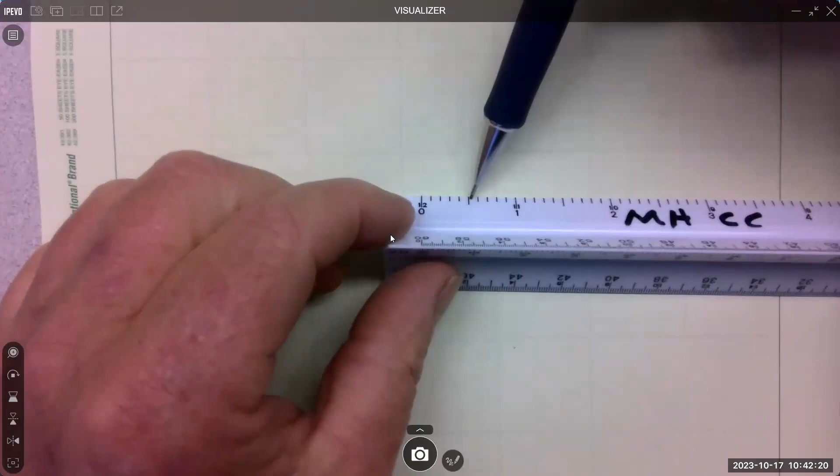So the engineering scale has a 10. For full scale, or 1-to-1 real size, there are 10 increments for every inch. So if you want to draw 1-to-1 with this scale, you're looking for the 10 scale, which means an inch is broken into 10 spaces, a 1/10. So this is 1/10, 2/10, 3/10, 4/10, 5/10. 5/10 is a 1/2 inch.

Now, going back and forth, if you're given information in fractions, like a 1/4 inch, you've got to use your calculator. If you don't know the decimal equivalent to a 1/4, take your calculator: 1 divided by 4, and that's 0.25. So where's 0.25? Here's 0.2, and there's 0.25, and that's about all you can do if you're manually trying to lay something out. What's nice is we can lay this on a drawing, or sometimes on an object, and actually do some measuring to get some idea.

Now let's figure out how the scales work. So what I'm going to do, and you can do this too if you want... focus. I'm going to draw a 4-inch line, 1-to-1.

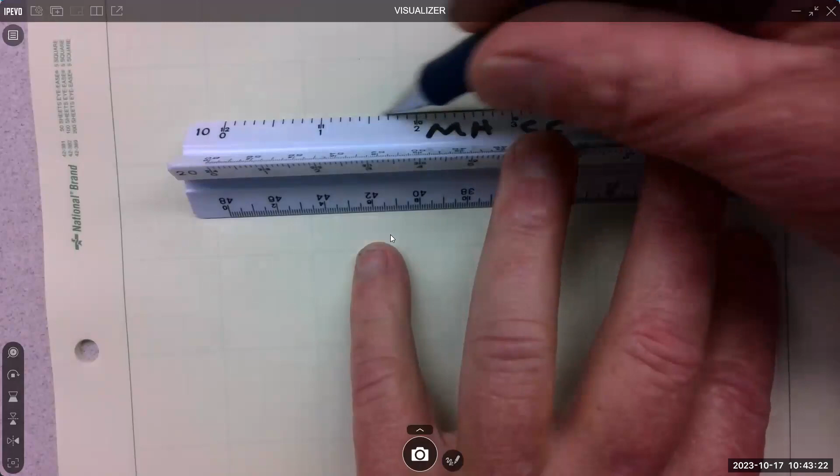Four-inch, and the scale is 1-to-1. That's how we write the scale typically. Sometimes you'll see it written out as 1-to-1, but it's not very common. Sometimes I have seen it written with a slash, which does not look good, it's not great. It does work, you could go 1-to-1 with the slash, but I wouldn't do it. This is probably the preferred way. And it's going to be in the title block, and that little box is going to say scale. So it's pretty straightforward.

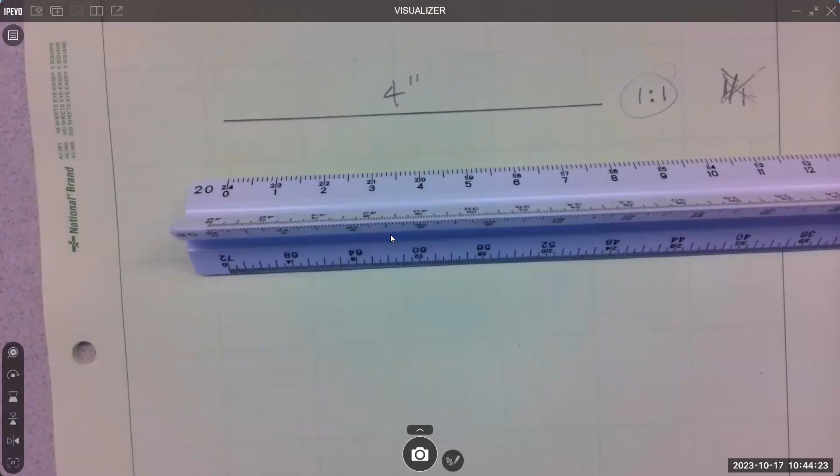All right, so then if I take the 20 scale, and this is how this scale works, you always use the real number. So if I want to draw a 4-inch line at 20 scale, which is a 1/2, that means there's 20 increments for every inch. That makes sense? 20 increments for every inch, and you can see they're getting pretty small already.

But if I'm going to draw the 20 scale and I want a 4-inch line, I literally just read the scale and go to the 4, and I'm reading that 4. This little 20 is just reminding me that I'm on the 20 scale.

And on the drawing, it would be labeled 4 inches, and this would be a 1 to 2 scale, half scale. It's half as big as the first line I drew. Make sense? What's nice about these is you don't have to do any math, you just read the scale directly and draw. That's what's nice about it.

If I wanted 10 inches at 20 scale, I go to the 20 scale, find the 10, and mark it. Boom. I just have to know what scale I'm working with and use that scale over and over. All right, it goes up to 30, so now I have to find the 30 scale, and I'm going to draw my 4-inch line.

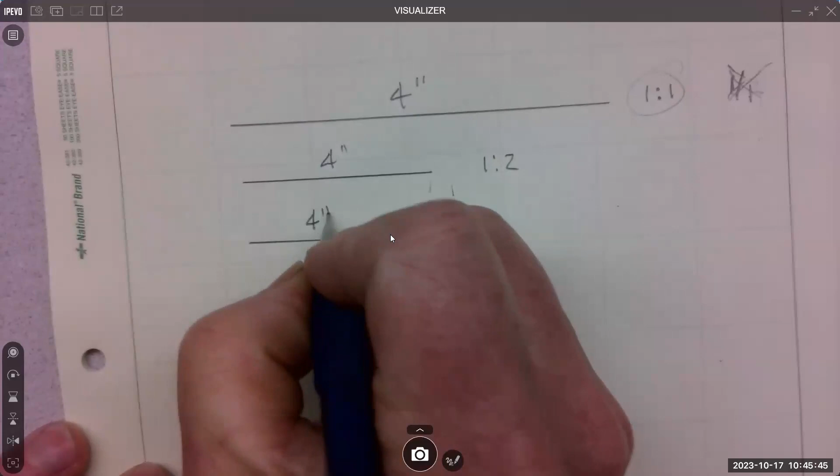On the drawing, it's always 4 inches. That's a 1 to 3 reduction. But if I was going to dimension it on the paper, it's 4 inches. We always put down what it really is.

That's how they work, and you get 6 of them. You get 6 times reduction with this tool. If it's beyond that, take this little tool and set it aside because it doesn't work for 1 to 10.

Yep, use that directly. Hey, I don't give you all the information up front. If I did that, we'd be done in a week and you'd be buried. We'd just dig you a pit and put you in it.

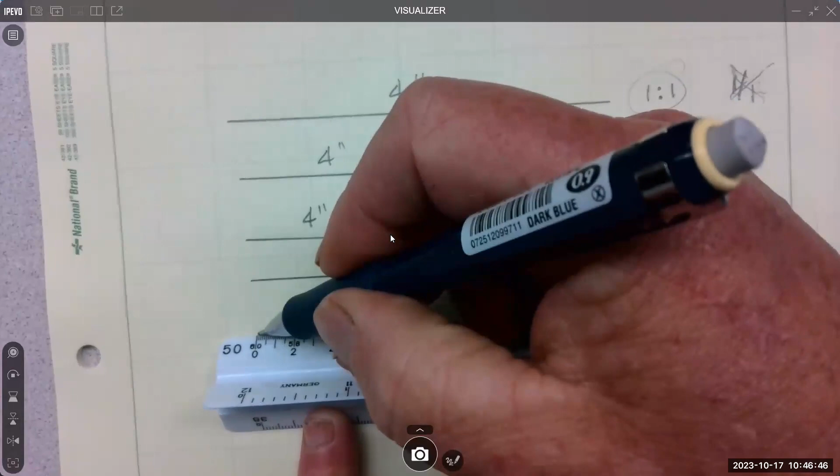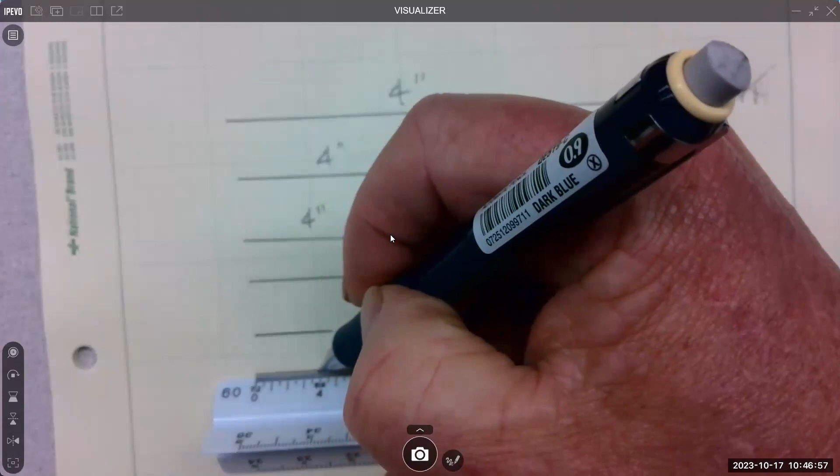All right, we're just gonna do them all, so you can just do them all. Here is 1 to 4, or 40 scale. Here is the 50 scale, which my eyes can just barely see the little ones. And then there's the 60 scale. I gotta find the 4, which is pretty easy to find. So I'm 1 to 3, 1 to 4, 1 to 5, and 1 to 6. And these are all 4 inches.

So 6 times reduction is pretty good. The tool does pretty well for that kind of thing. So once you figure out your reduction, you can use this, go for it. Just make sure you lay down the correct one. There's not a lot of difference between the 5 and the 6, so if you lay the wrong scale down and work for a few minutes, you just really muck things up. So, questions on the scale? It's handy, right?

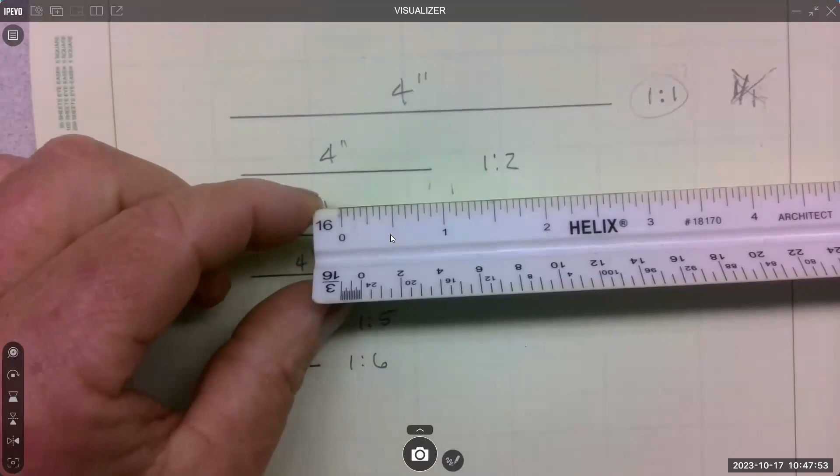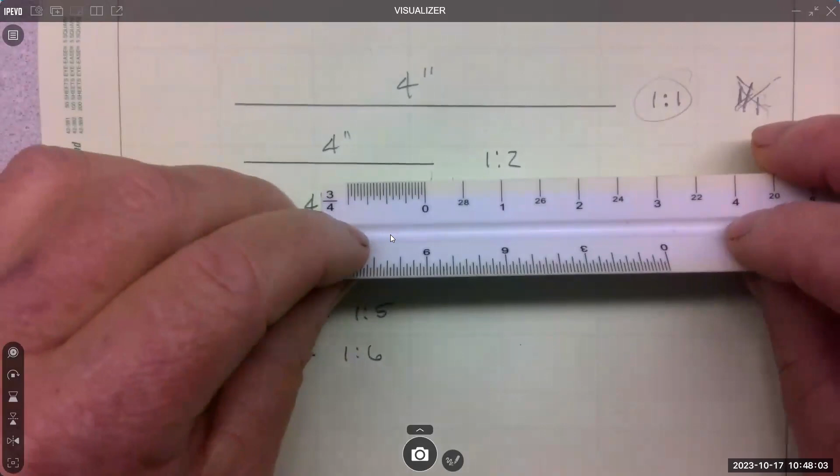The architect one is the same way. It's just a little more difficult to figure out, I think. So the 16 scale, that's a normal one, right? Then there's all these versions of it. Like here's a 3/4 scale, right? So there's 1 inch, there's 2 inches, there's 3 inches. If I want 3 point something, like 3 1/8, then I have to go this direction with it. 3 1/8, 3 1/2. So it's a little different to figure out, right? Architects are a little different.

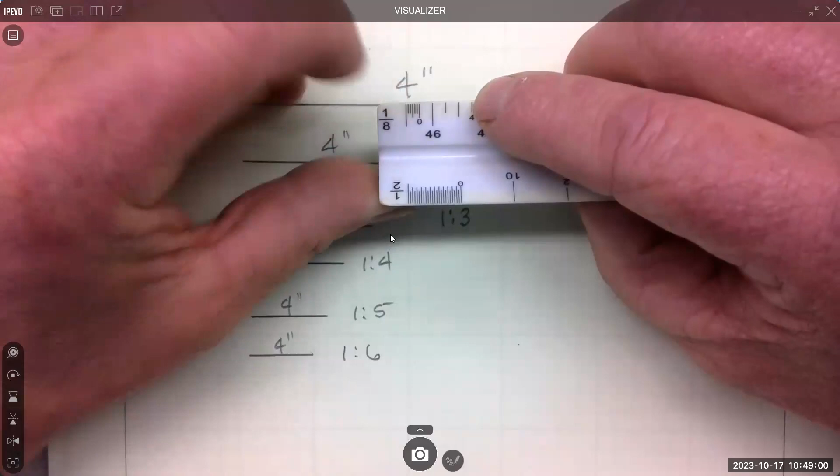It's 3/4 reduction, so that's 3/4 of an inch equals 1 foot. That's the reduction, right? And there's other reductions. There's 3/32, that's a really small one. And then there's an 1/8 scale. So if I wanted to draw a 4-inch line at an 1/8 scale, it's right there, from there to there. If I wanted to draw 4 1/2, I got to move this way and pick up that little half to right there. So it's weird. Anything over an inch, you got to look back at this part and come up with a little fractional piece. And that's just so they didn't have to put all those little lines on there. But once you get used to it, it's like, oh okay, I get it, right?

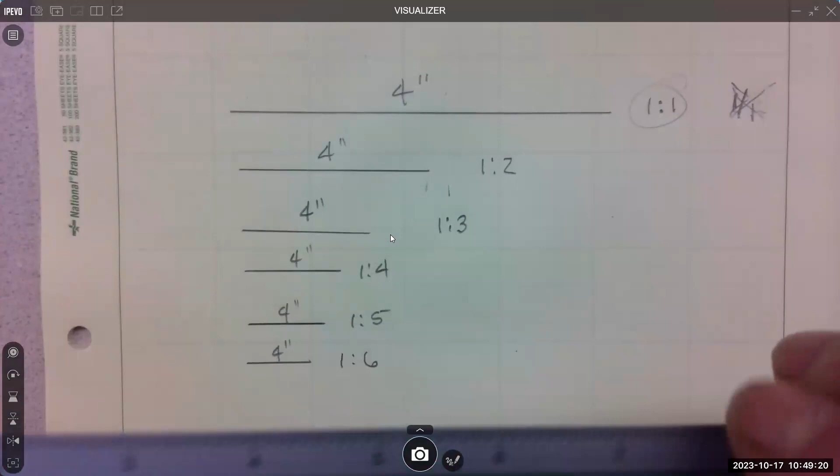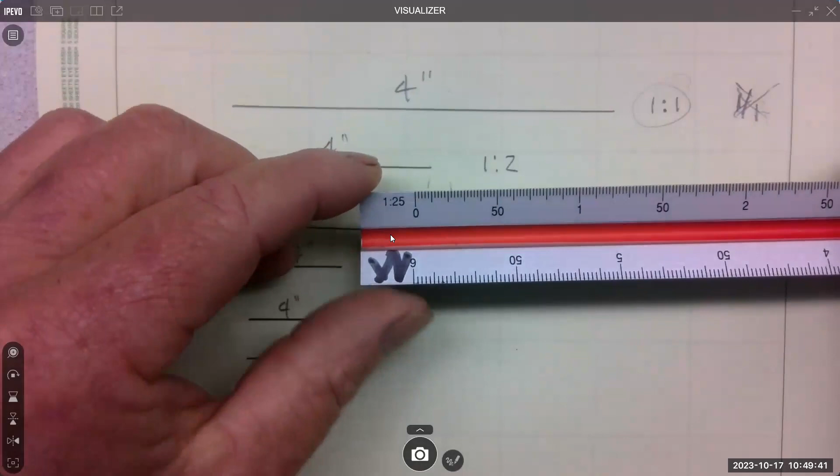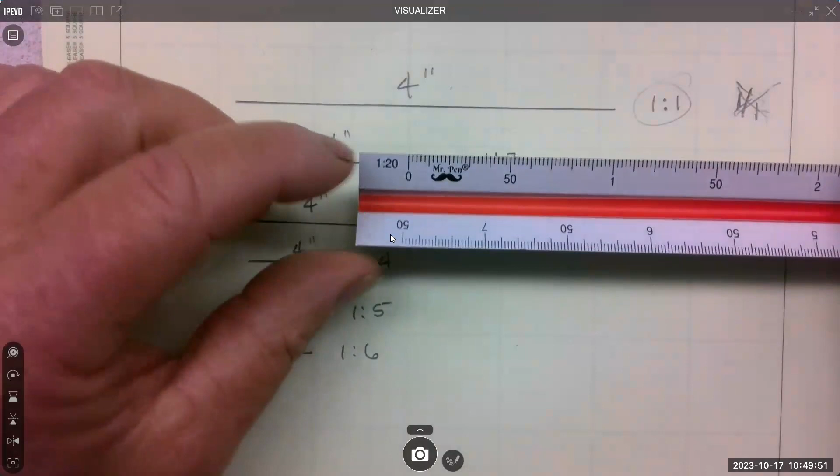So there's that. And then the metric one is similar to the engineering one, so you can figure it out pretty easy. Here is 1 to 100, 1 to 50, 1 to 20. So any of those scales you can get, and they actually show you the scale, right? 1 to 25. One to 20, and that's the reduction. So that's 50 millimeters. This whole thing's in millimeters.

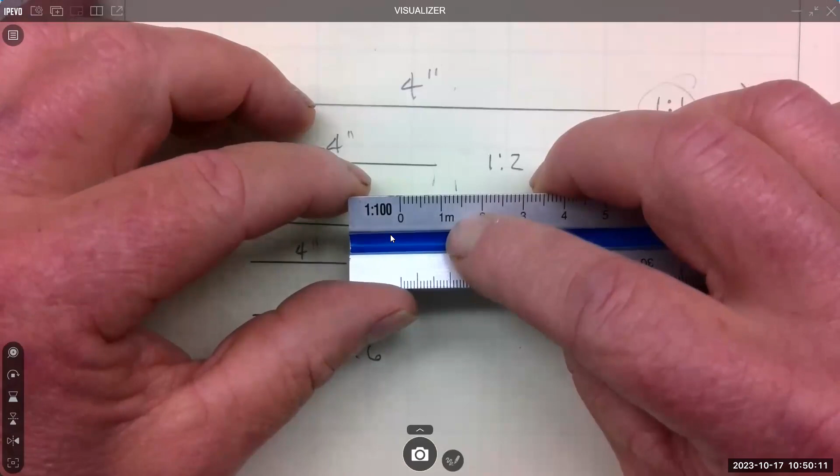Although I did see somewhere where they had it in meters. Oh yeah, right here, meters. So that's a 1 to 100 reduction. That's a lot, where 1 meter is right here, or 1,000 millimeters. It's like, whew, that is reducing. 1 meter is right there, right? 1 meter is 3 feet. That's big, so that's a serious reduction.

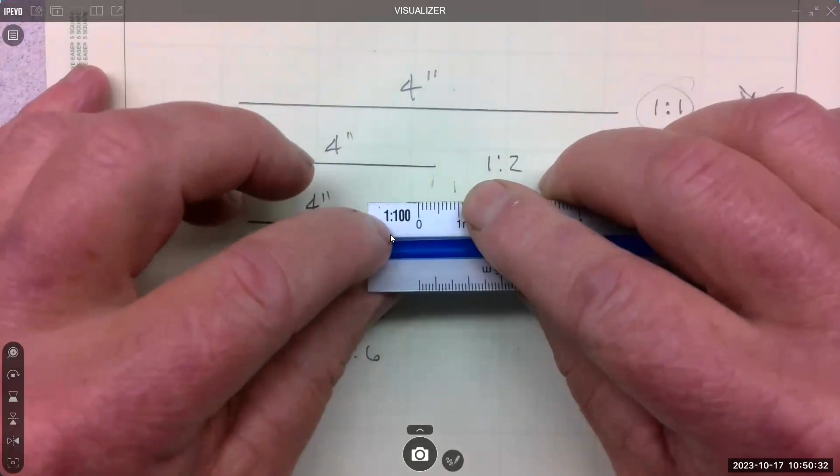So 1 to 100, that's 1,000 millimeters right there. So each one of these would be 100 millimeters, right? Because it would be 10 times 100 to get to 1,000. Yeah, I mean it takes your brain a second to figure this out, but not too bad.

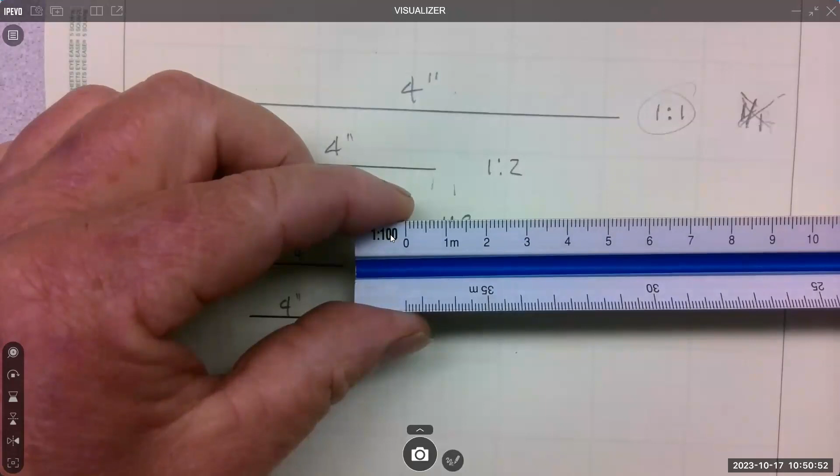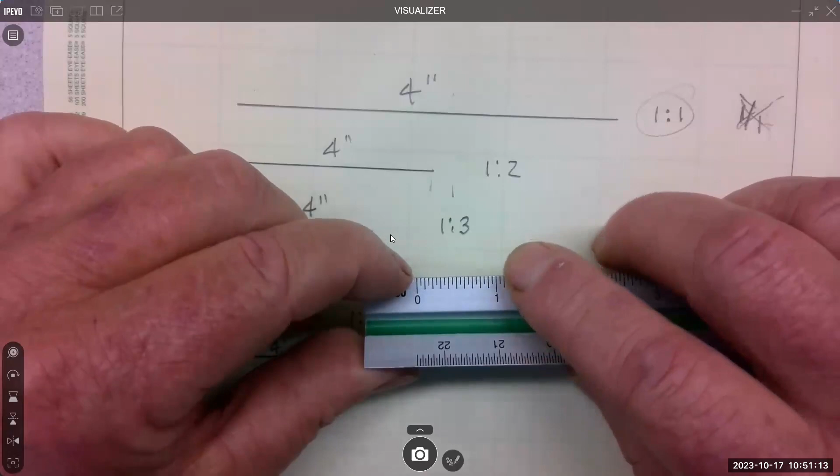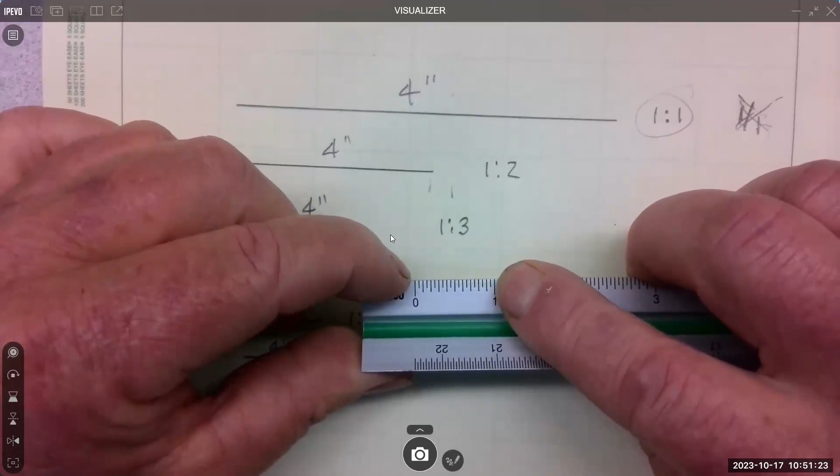So then you have the ability, especially with the metric system, since it's just factors of 10, to adjust that scale however you want, right? So if you said this was a millimeter, then that's some kind of increase, right? That's like 10 times, because I'm guessing that's a millimeter. So just change the scale in your head and now you're blowing something up instead of reducing it. That makes sense? This becomes 1 millimeter, then that's 2 millimeters. Well, that's 10 times bigger than what the object actually is. If you were drawing something really small, you need to make it bigger.

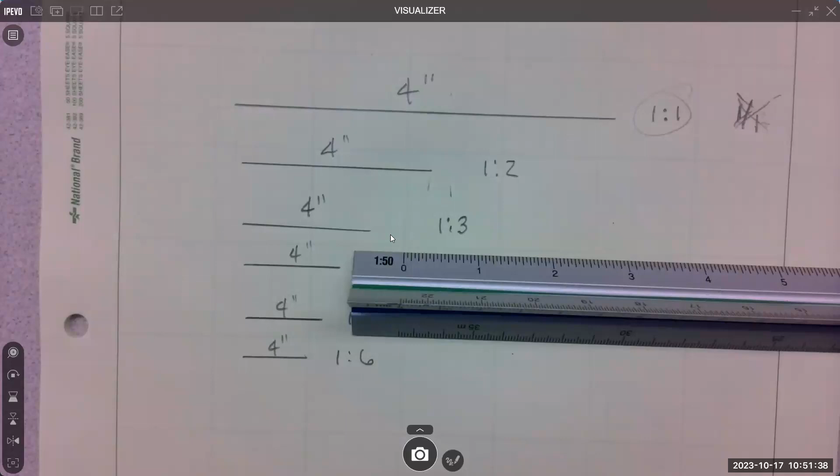These are not as good at that, although you can do the same thing. You can say, okay, I'm going to use this 10 scale, but that's going to be a foot. So that's a reduction, right? Or I could say, okay, that's going to be a foot.

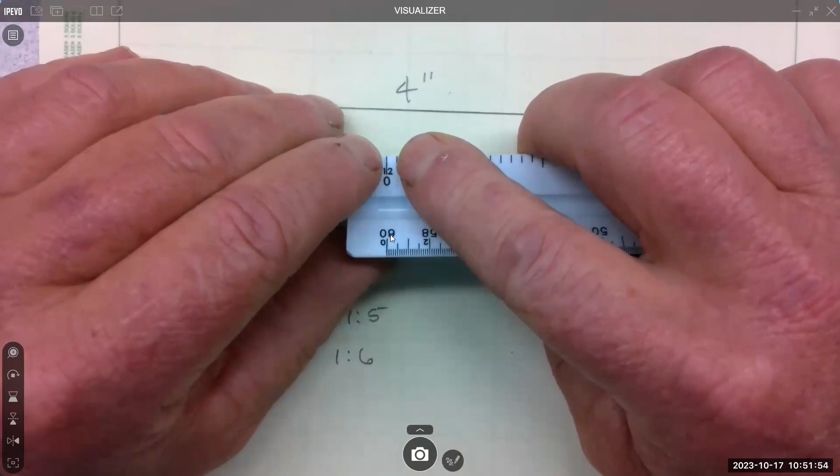So now I have a really big scale. You can create your own kind of scale with this whole factors of 10 thing, which is what this is. The architecture scale, you just can't do that stuff with it. It doesn't make too much sense.

All right, good on the scale. Hopefully you'll be able to use that on this last assignment. And you'll have other projects in this class. Like we do a project, and guess what, I make you do graphics on your project. So you'll be drawing more, using these skills through the term.

After this, we jump into Excel for a while and figure out how to make equations in Excel and make them work for us. Sometimes I make you make a drawing and then bring that into Excel. That's kind of an engineering package as far as how we'd use Excel. If you know Excel, big bonus, it'll probably go well. But if you've never done formulas before in Excel, that's a new challenge. And if you've never displayed formulas in Excel, that's the hard part—you can make formulas all you want and make them all work super cool.

But if you're going to share that document with other engineers, they're going to want to see the formula you're using. They don't want to have to go figure it out. Like, are you using the bending stress formula? Are you using the shear strain formula? Are you using Young's modulus? What are you using, right? You can't just have a bunch of numbers and say that's right. So we have to be able to show it. When we get into Excel, we do some pretty unique things.

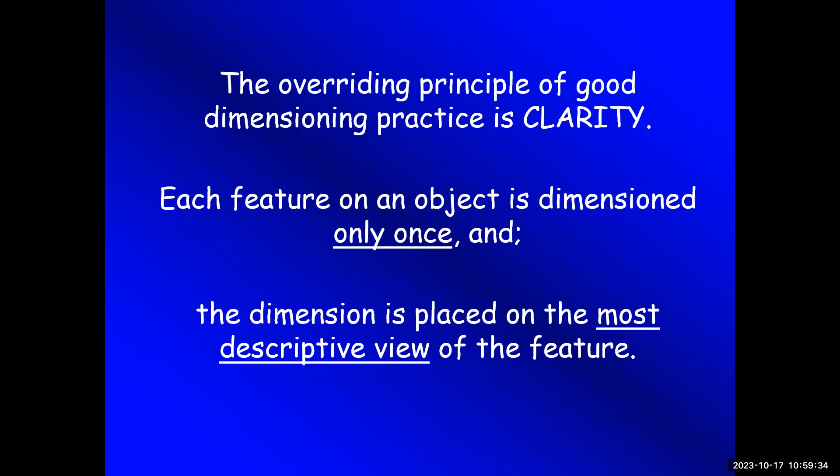But the last thing is we want that dimension, so like on this one - remember this one? We kind of did it as a practice thing. So the overall dimension, this profile is the most descriptive view, it should have the most dimensions on it. Because it's pretty clear that this dimension should be here and not over here in the right side view where it shows up as a hidden line. We cannot dimension to hidden lines, first of all, but you want it in the most descriptive view. So if the overall dimension is best here, this is where it should go.

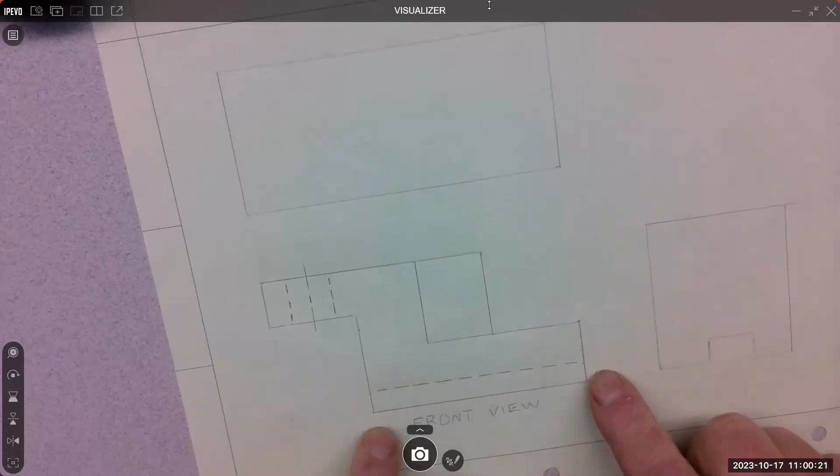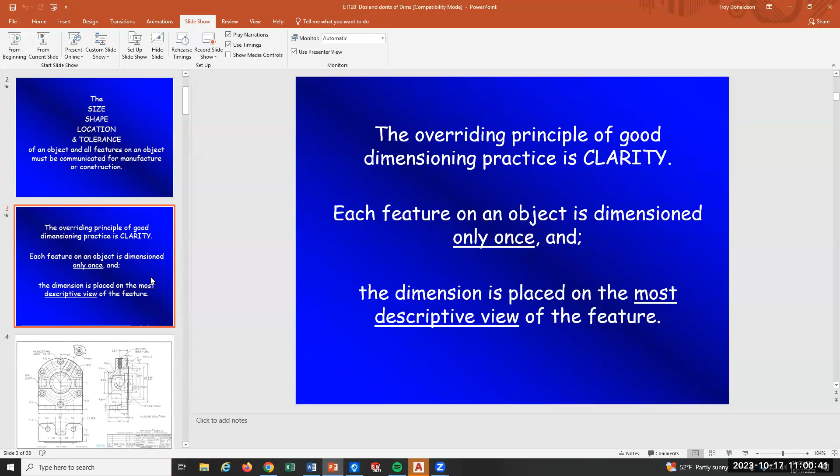If the location of this edge here is nicely viewed here, that's where it should go, not up here - like this, that may be a solid line up here, but this is a better spot for that dimension because it's more descriptive. So try to put them in the most descriptive area. I'm going to talk a lot about this, so if you want to take a note, you could. All right, clarity, we did that.

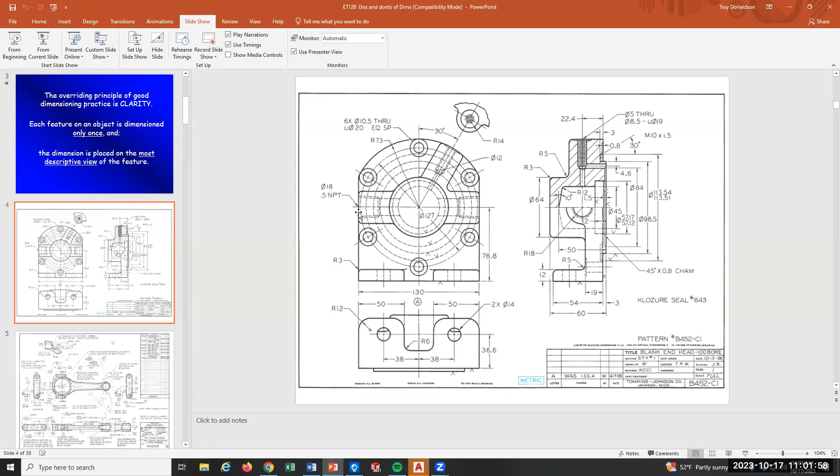One second more on leaders. The important thing on leaders is if they point to something - let me blow this up a little - if they point to something like this, that's perfectly legit. Notice it touches, the arrowhead touches it. That's important. We don't just point from a distance with a gap. And if the leader continued, it would go through the center.

Does that make sense? If this leader continued, it would go through the center mark. In other words, we don't come down and point to like an edge of a curve. We just go like where we would go directly to the center, but stop it at the object. And they can flip around, like they can be like this, that's perfectly legit. Or they can be like this.

I don't know about that. That's personal dimensioning preference. I'm not going to grade you on that. What I'd look for is that, hey, does that thing shoot through the center? Because that's what we want.

Frank, you had a question. Oh yes, Juan, you had a question. I answered it. Such a good lecture.

What's the 2 times mean? Means 2 locations, and it is very obvious at the 2 locations. That's the only time you can use it, is if it's so obvious, like in this view, there is only 2 holes. So that's perfect. I saw one up here that I thought was, oh, this is a different one.

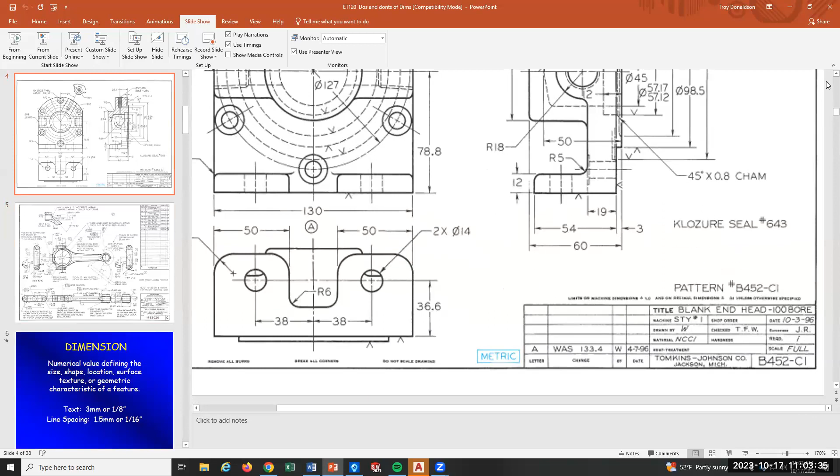Oh, that's pretty obvious, right? 5 locations for this thing. 1, 2, 3, 4, 5. Whoops. What? 6 locations. Okay, that's better. Don't get your locations wrong. So that's good. I mean, that saves you a lot of dimensioning, right?

So these fillets, they're all different, so they're all labeled and called out. A lot of times they're the same, so you can just call out R5, all fillets, right? So use that strategy and don't be afraid to use words to explain things. Like it's okay.

There's a lot going on here. We're not going to learn everything, but all these symbols, that's all part of dimensioning. In our book, you could look up all those things like this U thing. What's that mean? That's a bore. It's a boring process. There's I think some depth on here. I thought I saw an arrow and a depth.

Here's a chamfer. Right? So a chamfer is just not a rounded corner like this, but just a straight corner, like it just chopped off. A lot of times they're at 45 degrees.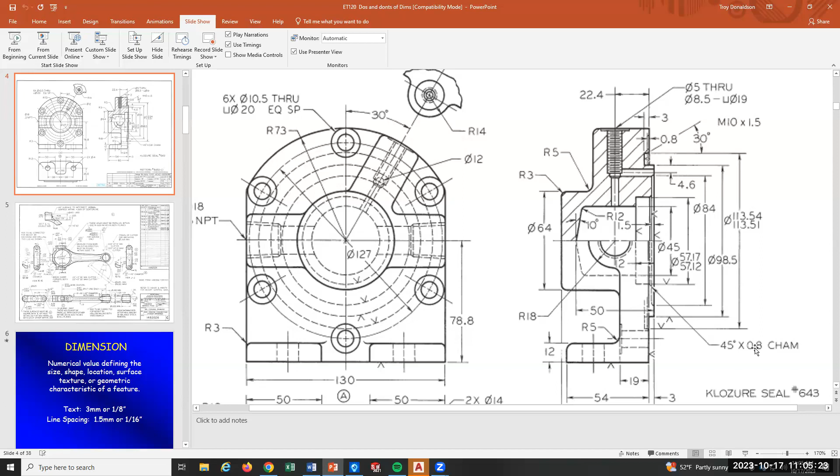This one's super hard to see because it's so small, a 0.8 chamfer. Sharp edges, really sharp corners, very high stress locations on parts that get loaded, and most parts get loaded, right? So we like to take those very sharp corners and just round them off with a radius or a chamfer. That'll drop the stress considerably. And when you take strength of materials, we talk about that a lot, and we do both those calculations, and you'll see it. So let's look at their dimensioning.

Looks pretty good, not much on here. I don't know why they put that on there. I would pull that off for sure, no reason for that to be in there. There's lots of space. So this is the same kind of thing. This dimensioning, I think it's actually an example, not a project a student would do. So some of it I don't quite get. Doesn't all follow the standard, but most of it's pretty good.

These are called dimension lines. I think I said this once before in this class. Why? Because it holds the dimension. And this is important because this is the lingo we'll talk about. I'll be like, your extension lines, they're terrible, or your dimension line is wrong, it can't do that, right? You got to know what I'm talking about, or what somebody else is talking about. So these are dimension lines.

What's that? It's a dimension, but it's also a tolerance. Yeah, so that means, hey, it can be 113.54 to 113.51, that's the target. It can be, that dimension can be anywhere in there. Right? And that's important for the person building it. Very important, so they know what they're going to aim for. So not sure what that is.

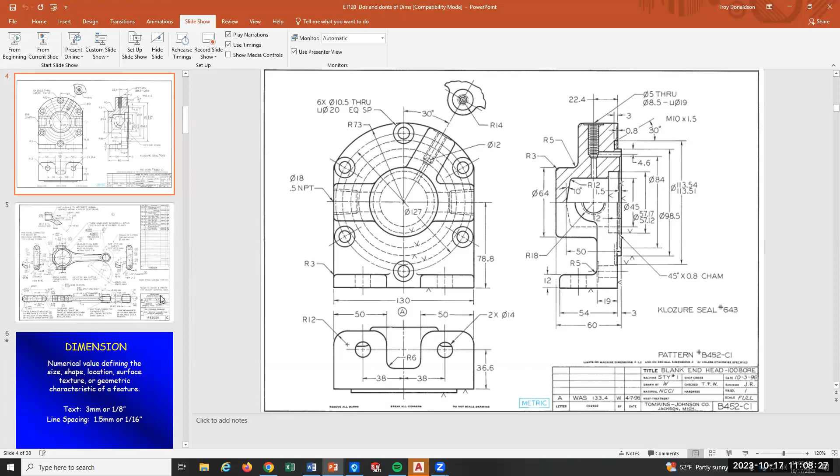I don't see a front view labeled here. Right here - nothing, didn't name the view at all. It's bad practice. Why not? You're labeling all these other views, why not label that? I'm sure an engineer would say it's obvious that this is the front and that this is what - the bottom? That's my assumption.

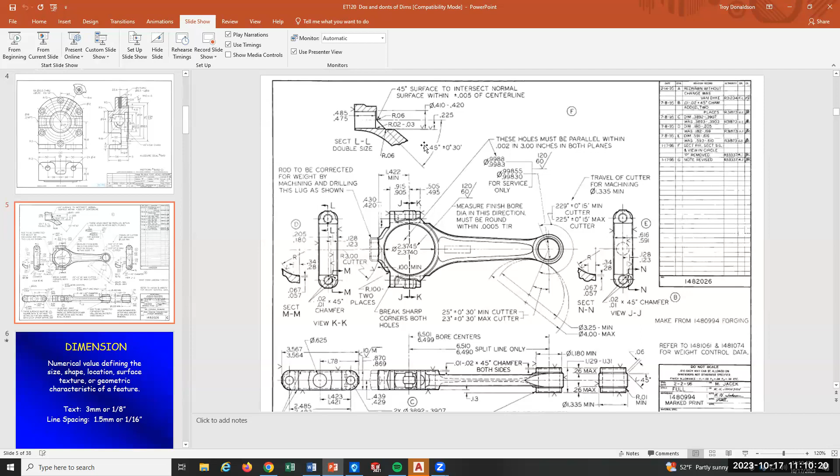Most prints nowadays are not labeled. Yeah, it's kind of a lost thing. But I don't like making the assumption, because everything's not in projection - like this is not in projection. Anyway, you can see we have a lot of different views. We're not even going to cover near all of the possible views you'll come across.

This is some kind of a blown up view - it's section LL, and it's double size. So I have to find section LL - here's one L and here's the other arrow, see that little arrow right there? It's just pulling out a very small piece right here and then putting it up there and blowing it up. So all strategies try to give a full shape description - that's our goal.

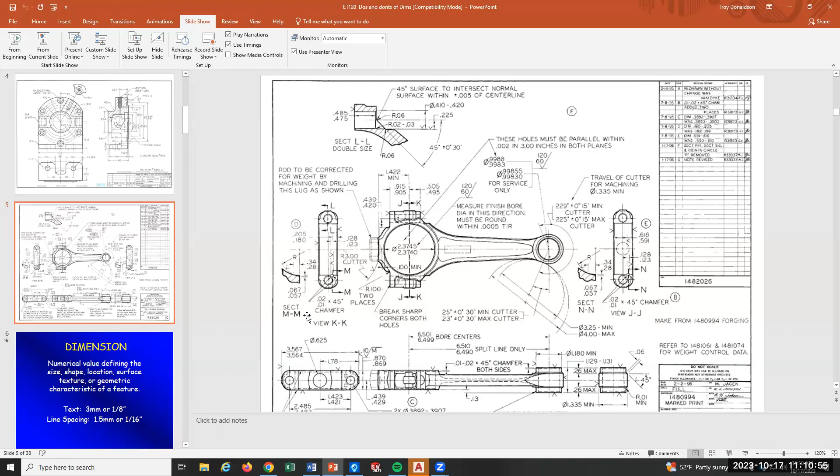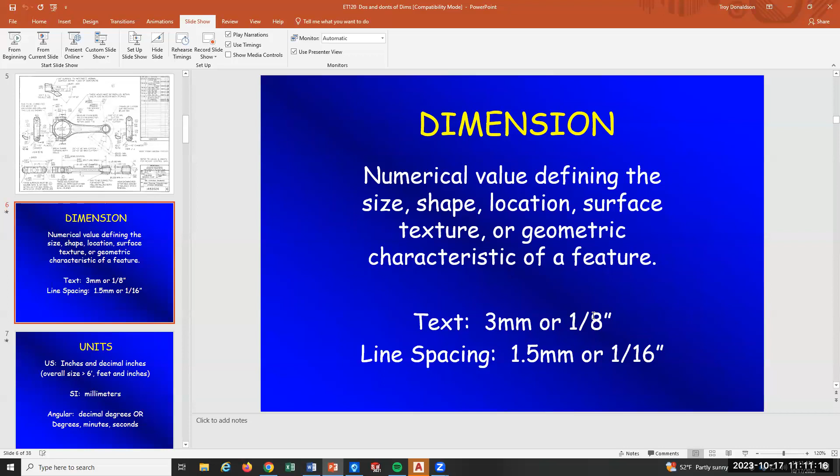A dimension has the numerical value defining the size, shape, location, surface texture, and so on. Typically, text is 1/8 of an inch in your dimension - that's what we want to put down. Line spacing refers to the spacing between the dimension line and the text - see that little gap? This is the dimension line, it comes, it stops, and we put our text inside the dimension line. It's about a 1/16 kind of gap - just make it close, but not too tight.

Notice how this one's offset - that's good strategy to get it out of the way of this extension line. This is actually a rule: extension lines are not supposed to go through dimension lines. That's a no-no, but they must have thought there was no other way to pull that thing through, so they just did it. We want to try to avoid extension lines or leaders blowing through dimension lines.

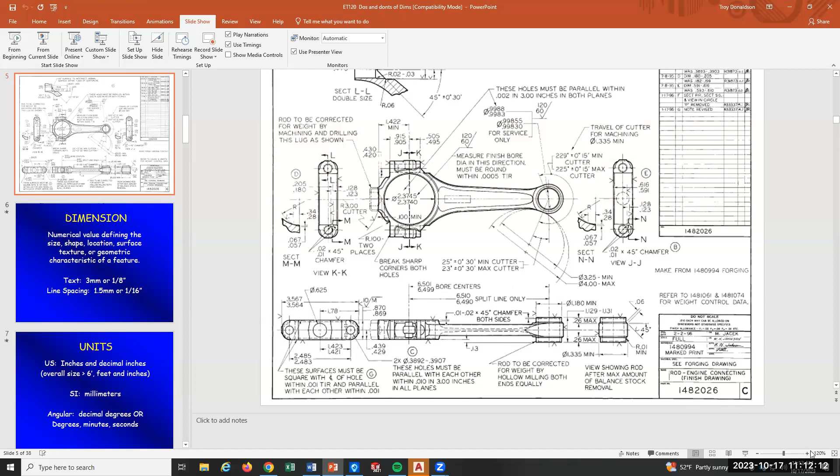Is there ever an instance where it's just too busy, so you do a second page for the next view? Yeah, definitely things like that happen. This is super busy, but it's really hard to put views together in your head when they're on separate pages - this is a lot easier, believe it or not. This could all just be on this page, and these projections off of it could be on a different page. Very possible - this is a super complicated thing to try and draw.

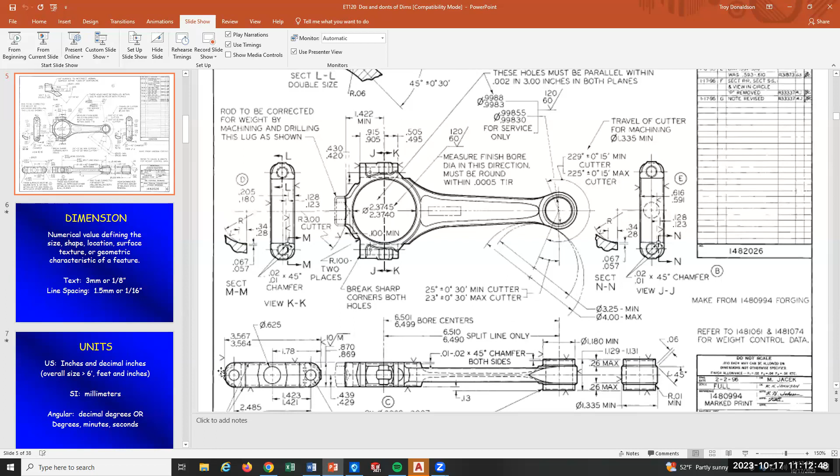We're going to use decimal inches when we put our numbers down. You don't have to put the little inch symbol if there's a note in the title block that says dimensions in inches. So that's what we want - put that in the title block, and then we don't have to use the little marks for inches. We're not going to use feet, the assumption is it's all inches, but it needs to be in the title block. If it's millimeters, that needs to be in the title block too.

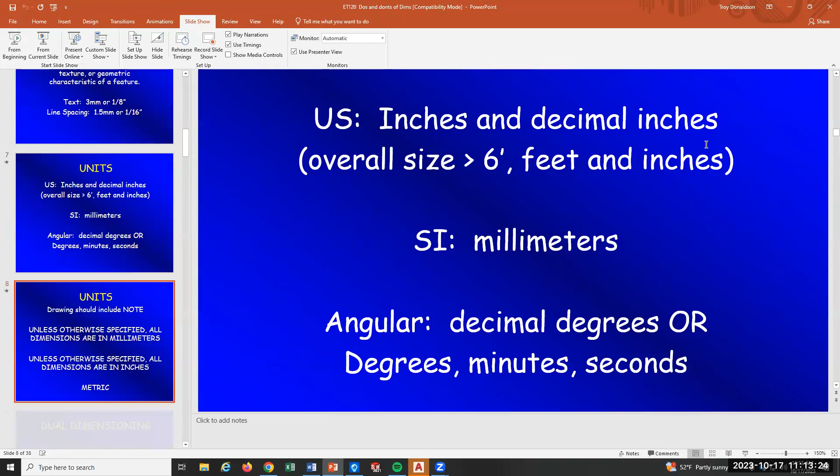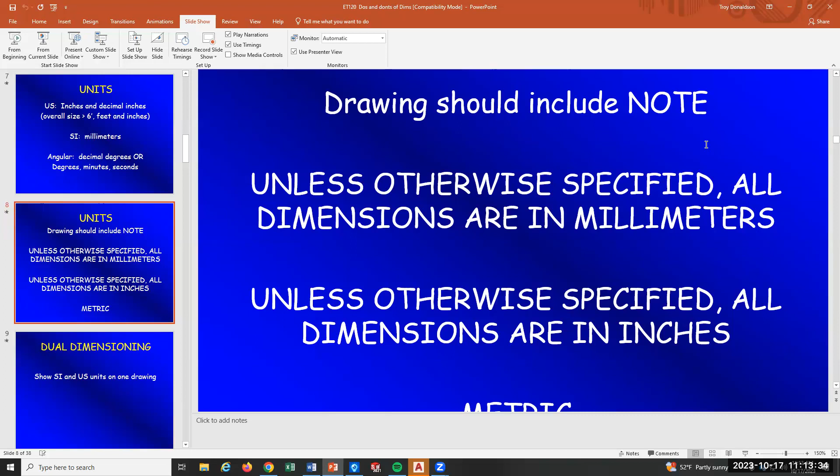That's the note, it's all good. Dual dimensions, we're not going to get involved in that.

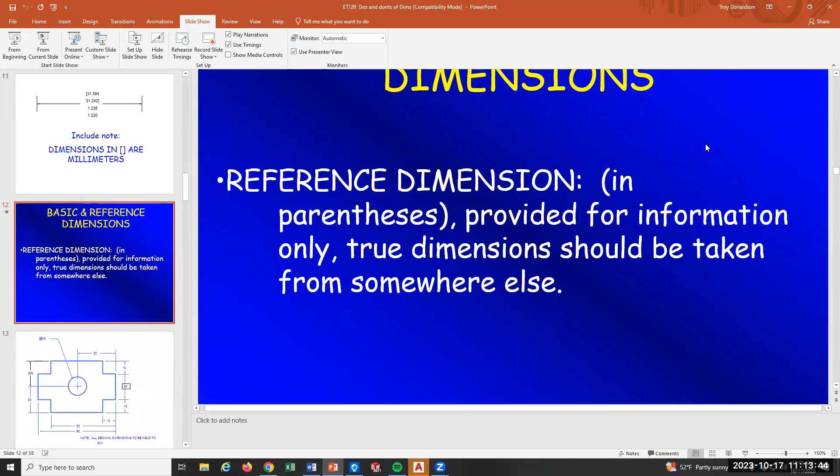Not doing it. All right, so let's talk about some basic dimensioning. Here's the note down here: all decimal dimensions should be held to a basic tolerance. That would usually be in the title block. If I don't give you a tolerance, don't worry about it. You don't have to put it in, because we're not really going to go there yet.

But if I look at the dimensioning here, just as an example, this is good, this is all good. This one you have to decide whether you need it in there or not. If it's symmetrical and you leave it off, people could wonder, what's that dimension? Should I assume it's symmetrical?

So this one is put in, just in brackets, so we can talk about it. If you note the object is symmetrical, then this center line really should go all the way through. That's a standard for symmetry. If a center line goes completely through the object, it's symmetrical. But you could also write on that center line 'symmetrical,' then the question's answered.

And in manufacturing, that note right there, the 1 thou note - you'd question the engineer: do you want 1 thou overall, or 1 thou per branch? Is it plus or minus? Is it just plus 1 thousandths, meaning it can just grow bigger than all these dimensions?

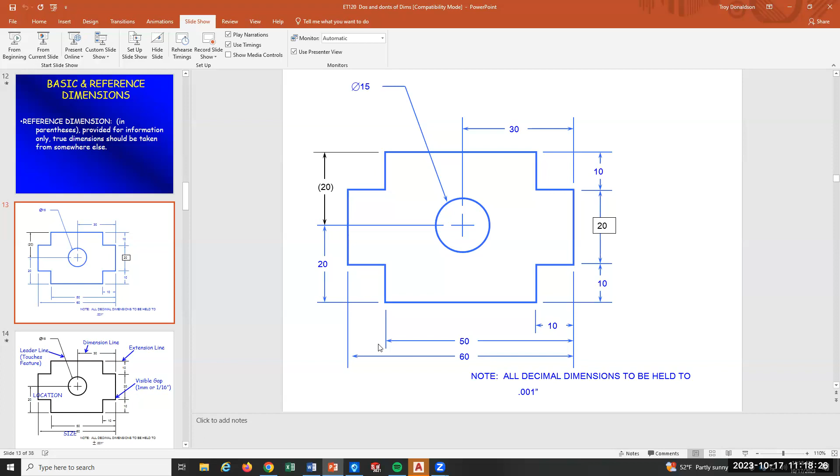No, but you want it to follow some kind of standard, so they look at it and go, oh yeah, I kind of get that. So here's everything called out. This is a location dimension. The 20 is locating the hole, and the 30 is locating the hole.

Where you pull it from is up to you, unless there's something called a baseline for the part. That's kind of next level dimensioning, but it's weird that you would pull from this side to get the 30 and from the bottom to get the 20. That's kind of odd. It depends on where the important features of the part are. But if you're just gonna do it, I would keep it together, like the 20 would be here, and this 30, I'd put it over here instead. So X and Y are relatively close to the location for this, just so they're kind of in the same proximity.

If we don't know a baseline and we don't care where we're pulling from, which is the way we're going to operate, then cluster the dimensions, get them close to each other, so the individual doesn't have to do higher level math to figure out exactly where this hole is. It looks like it's right in the middle. This is 60, that's 30, this is 20. I don't know if it's symmetrical, but I'm gonna assume it is.

So, visible gap, extension line, dimension line. These are the sizes of all things.

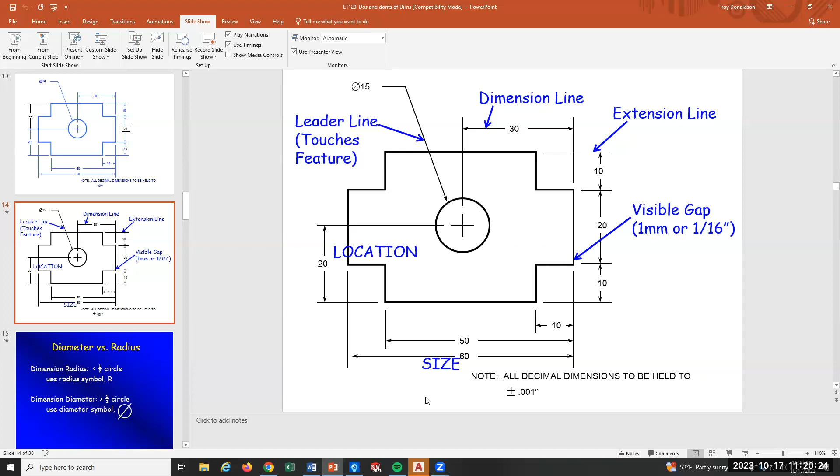That's enough, just use that practice to do this next exercise. The object is simple, which I expect everyone to get the front, top, side correct. Then you're going to spend your energy trying to figure out the best way to dimension it. We don't want to leave anything off. We want to know the size and shape of the entire object. I don't know what else is in here.

Those are different ways you can get a dimension in. Don't jam it. We want our dimensions to look like this, but if there's just not enough room, you are not allowed to make your text smaller, like a 16th. No, we need 1/8 inch text throughout the drawing. We can't make it smaller just to squeeze it in.

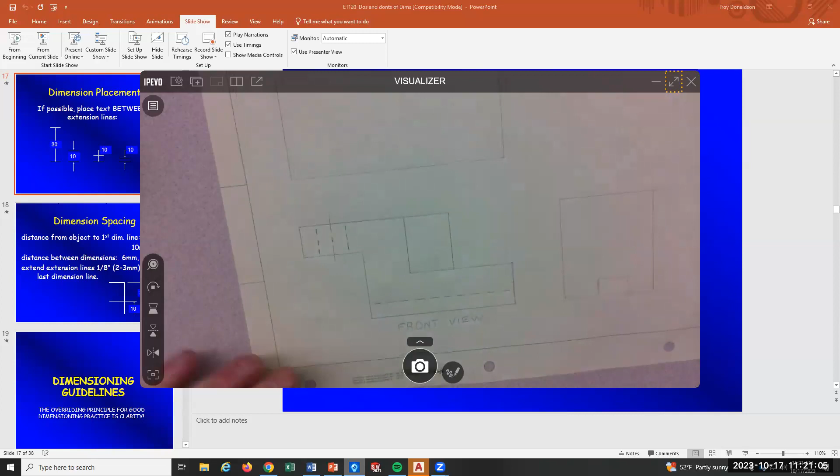Arrowheads, there's a standard for that, believe it or not. People, if you haven't done arrowheads, struggle with this. They're normally the text height in length, which is going to feel kind of big.

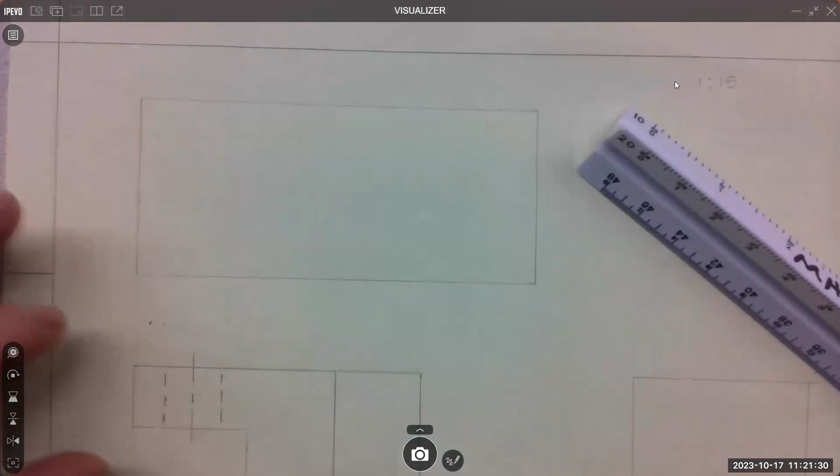If I'm 1/8 inch text, that's from here to here, so that means my arrowhead is the same length as the text. So that's about the right size. I don't know what I was marking there.

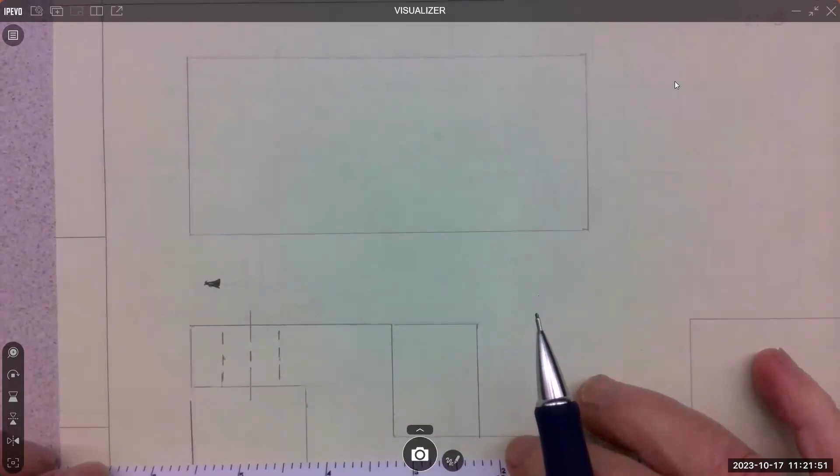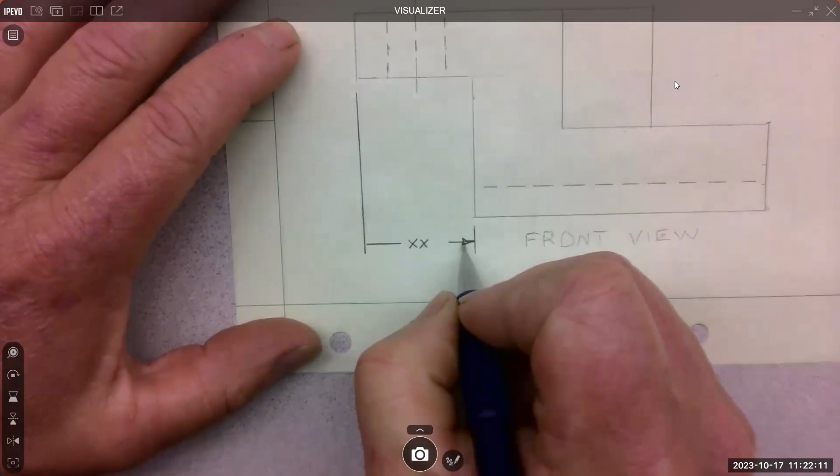I wasn't marking anything. So here, I'll put an extension line down here, pull this off, and then I'll put in a dimension of some kind. Leave some space. So there's my dimension that I'm pulling off. If I have 1/8 inch text, that's about that tall, then the arrowhead typically is that long. You just pull it out and make it super skinny, and it's super easy to fill in. That's about all you want for an arrowhead.

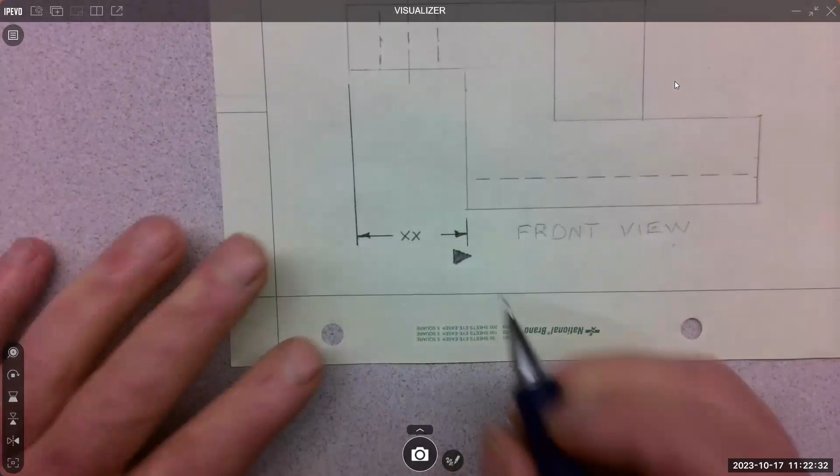Doing it manual, they don't need to be like that, and then you gotta spend an hour and get a bunch of graphite on your drawing and just make a mess. So not like that, just find your spot. I'll do another line, and just pull it out a little. They're super skinny and tiny, and they just kind of mark a spot and they touch.

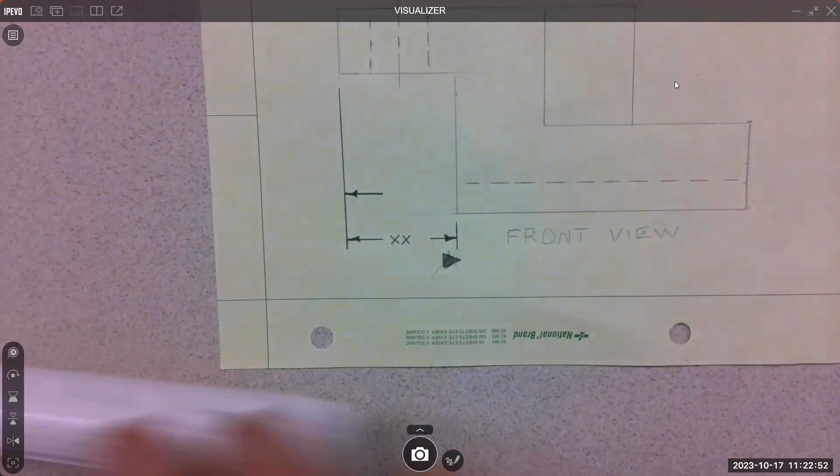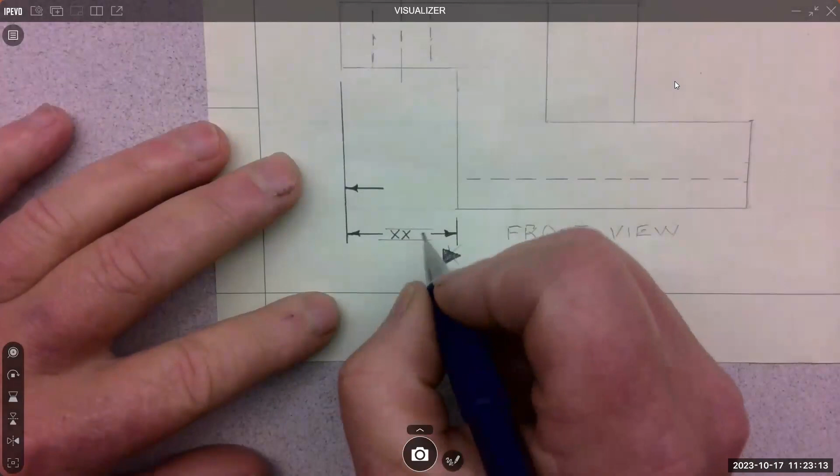All text, unless you're using grid paper, which you're not, even if you just have to do it by hand like I just did, give yourself a guideline. I don't even care if you measure it's an 1/8, it's approximately an 1/8, that's all I care, and if it's all that size, that's all I care. But it does help you keep some decent text.

It's time consuming, takes a while. All right, that's good enough for that. Let's talk about title blocks real quick.

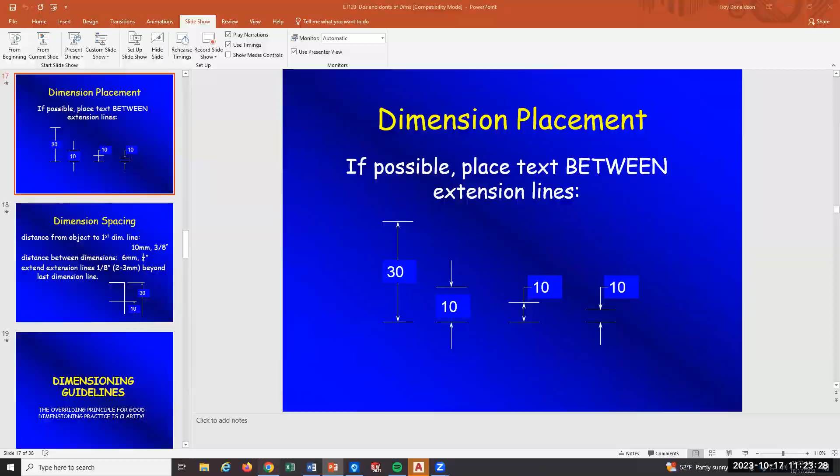Piece of cake, just put it down. You can fill it in later. I wouldn't fill it in first, but I would definitely lightly put it in. If you fill it in first, that just lays a lot of graphite on the paper and then you're dragging your hand over it the entire time you're drawing. It just becomes a mess. But you want to account for that space first before you start laying out your views.

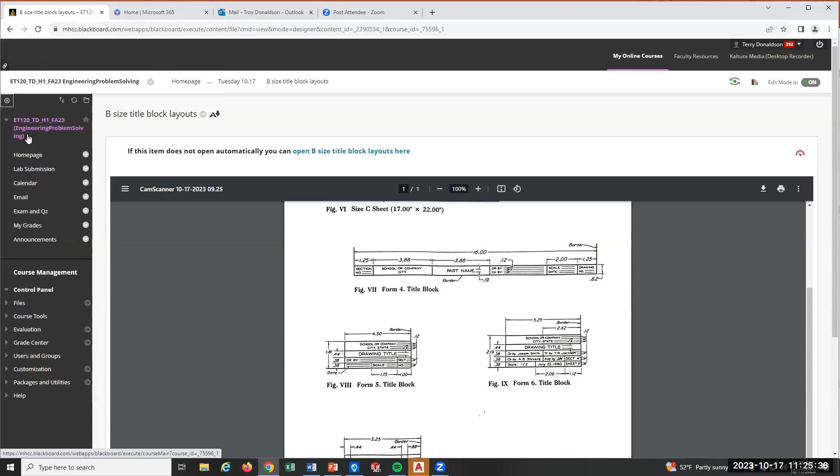I think that's it. I could show you the exercise. It's out of that same group as we had before. It's this thing, and it's number 7. And I think the tick marks are 6 inches each. So I tried to make it big enough, like, okay, 1, 2, 3, 4, 5, 6, 7. It's 42 inches in the front view. So that's definitely not going to fit on the paper.

So that would make you scale it. Half scale would be down to 20 some. That's not going to work. Third scale, fourth scale, you'll figure it out. But figure it out before you start drawing or you'll be in trouble.